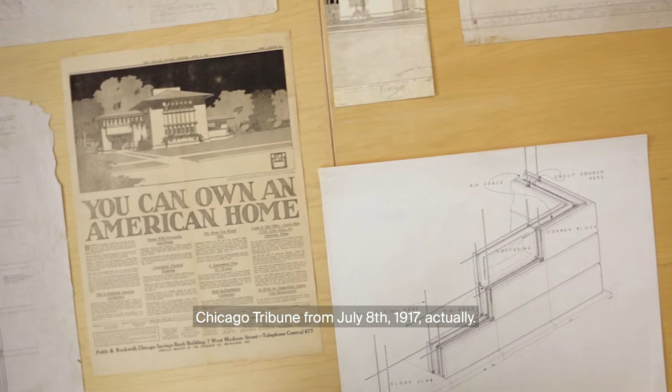We're looking at an ad from the Sunday Chicago Tribune from July 8th, 1917, actually. And this is of a house that is, according to the caption, being built. And then there's a huge headline that says, "You can own an American home," so a striking headline.

I think it's important to think about the fact that "You can own an American home" is in every newspaper that's circulated throughout the Chicago area. So anybody who picks up that newspaper is being addressed by this sentence. But furthermore, they're being told that they can not just own an American home, but a distinctly American architecture by a distinct American architect, probably the most famous architect of that time, 1917, Frank Lloyd Wright.

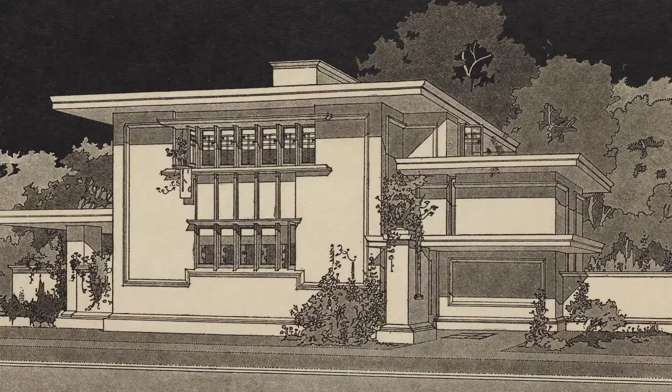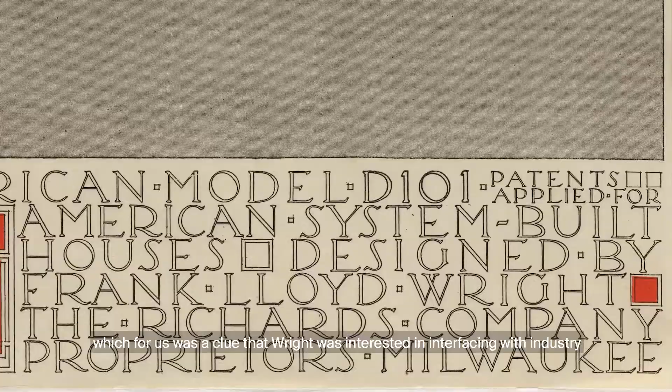Yeah, on the shop drawings and on the folio that was published by the Richards Company, every drawing that we saw said, usually in the lower right, "patents applied for," which for us was a clue that Wright was interested in interfacing with industry and creating intellectual property from his designs. And typically a work of art will be copyrighted, but an invention is something that you patent. So it was an interesting idea to think about architecture as something that you could patent.

I think the point is, since the beginning of his career, Wright has been very interested in how the machine can be an emancipatory thing, that this is the forerunner of democracy, as he calls it. So the evils that are experienced through industrial process, talking about inequity in labor or ecological degradation, which was already apparent at that time. So he was interested in the architect as an artist being able to harness this emancipatory quality of the machine and bring that to everyone who picks up a paper, as it turns out.

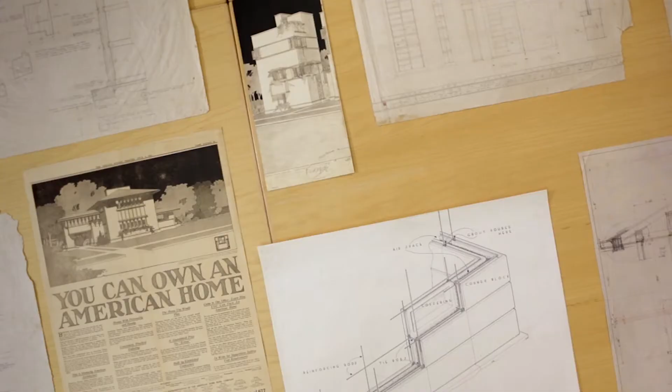I think what's important about having a factory-built house is that in order to get the common person, as it were, to have access to a house, you'd need to reduce the cost of the labor that it would take to make that house. So engaging the factory meant that you could reduce the amount of labor that was on the job site. So for Wright, engaging in the factory was really about democratizing access to houses more generally, but also, of course, to his own authored beautiful houses.

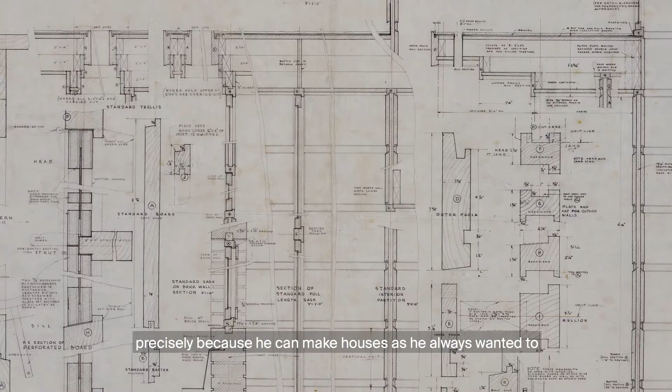So in the 1910s, when he's approached by the Richards Company, the labor market is very expensive in the US. And as a result, engaging in factory labor would have made sense. By the 1930s, during the Great Depression, the labor is very cheap. So Wright moves away from factory-made houses precisely because he can make houses as he always wanted to in the most beautifully crafted way possible, with intricate and incredibly beautiful details.

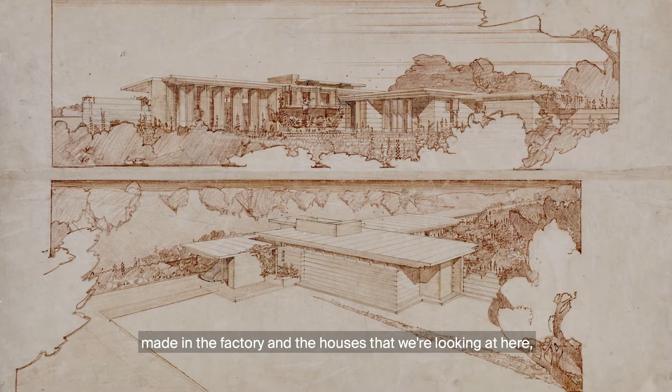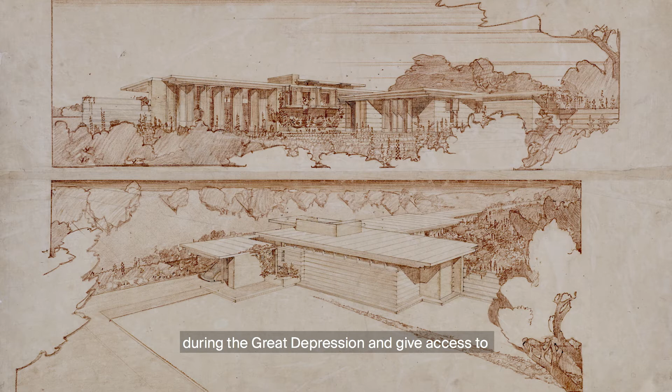The difference between a prefabricated house made in the factory and the houses that we're looking at here is that these houses were made actually by master craftsmen. The idea was to capitalize on the cheap labor market during the Great Depression and give access to people who otherwise wouldn't have access to Frank Lloyd Wright homes, to a system of houses that he called Usonian, which would populate the entire continent of the United States.

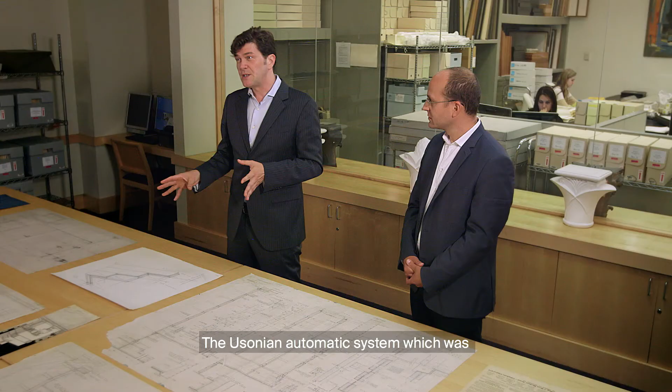So this brings us maybe from the houses that were built in wood to those that were built in concrete. The Usonian automatic system, which was intended to be built of concrete blocks. And these were intended to be made by the home builders themselves from the soil coming from their own property. So the intention was, and several of these houses were made that way, that the clients, usually husband and wife, would work together making the blocks. They would work together establishing the slab for the house.

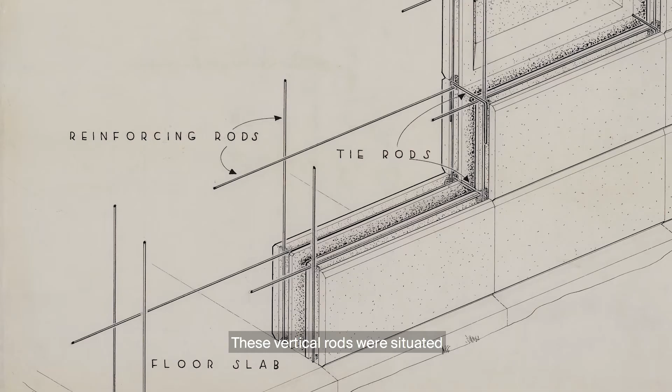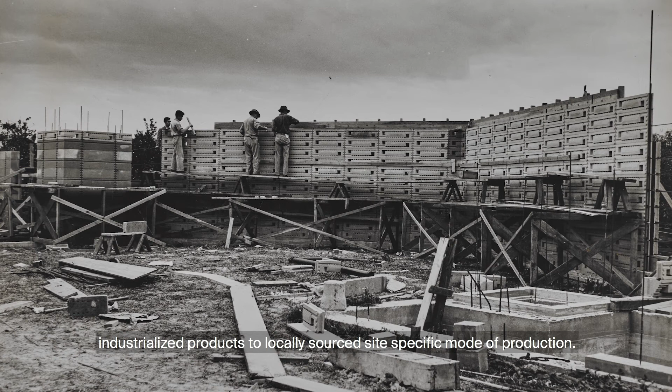These vertical rods were situated at regular intervals at 2 foot on center around the perimeter. The blocks were slid down onto these rods, and as subsequent courses were laid up, horizontal rods were also inserted. This was definitely a paradigm shift, that it goes away from industrialized products to a locally sourced, site-specific mode of production.

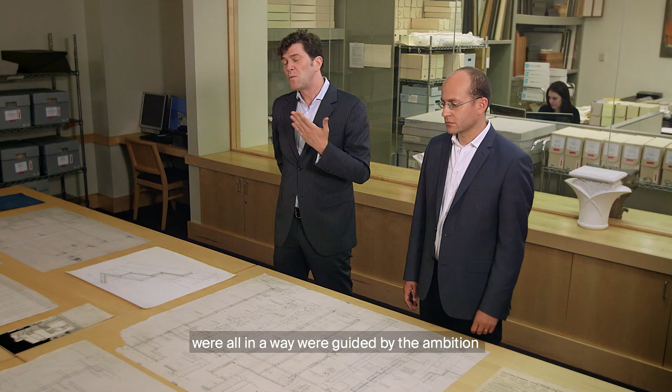I think Wright was concerned about the role of architecture in society. He was ambitious that architecture not be lost as a cultural force, and so his ambition for first systems and then for standards were all, in a way, guided by the ambition that it be something that's a cultural force. So when you talk about the Usonian house, Usonia to him is a term for a culturally mature United States. So if you talk about, you too can own an American home, in this case, it's talking about an aspiration for a greater society, actually.